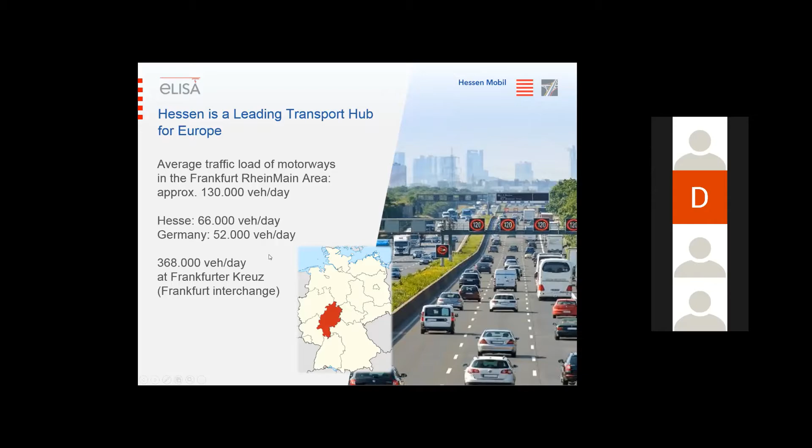And in this surrounding, since many years, we not only operate advanced traffic management systems, but we are also very much involved in development and testing of different future technologies, especially in the field of cooperative, connected and automated mobility, but more and more as well in technologies to decarbonize the mobility system.

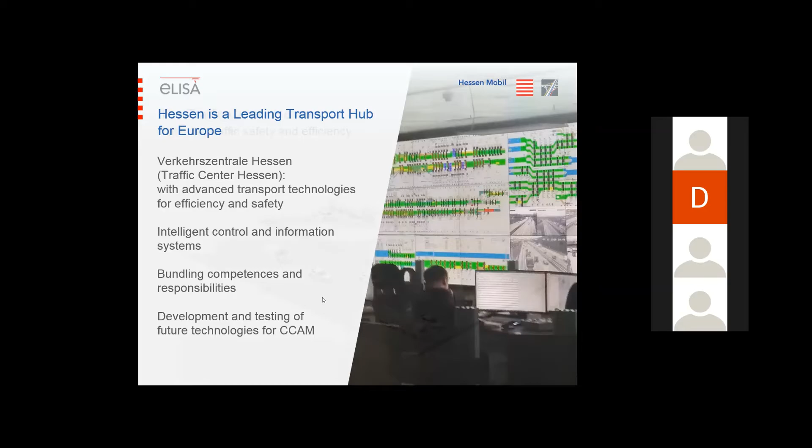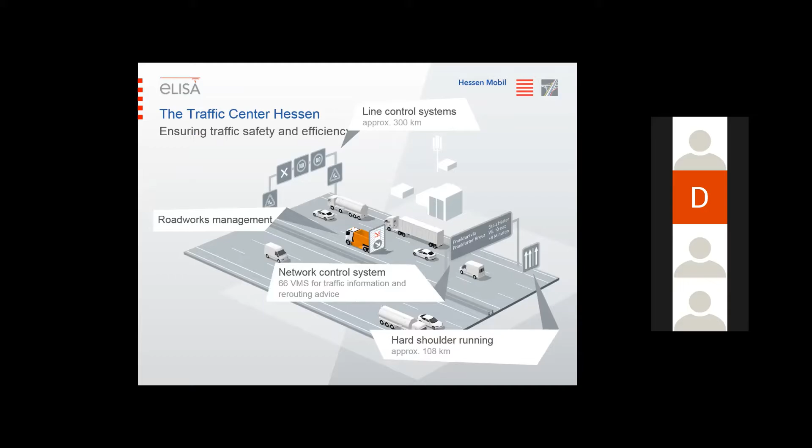Our center is the traffic control center, which is our premise, located right in the center of the region, and from that traffic control center we control, we manage, we influence the traffic on the whole motorway network in the federal state of Hessen, with a lot of different means of influencing and controlling the traffic: line control systems, hard shoulder running, network control systems with VMS signs.

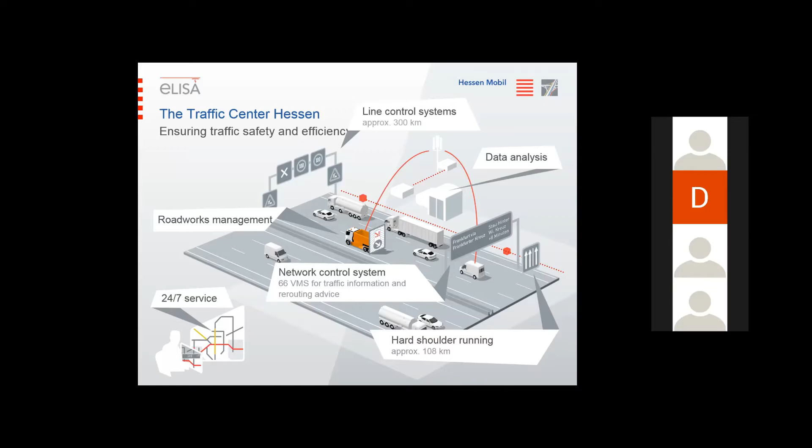And what was a good background for running such an installation like an e-highway is that we are in 24/7 service with our control room. But as you can see, we are traffic engineers. In the beginning of our project we had no electric engineers in our team, no engineers of energy systems, but we of course had some experience in running large infrastructure systems. And this is surely one of the reasons why we said we would like to take the challenge to run an absolutely new system type like an e-highway.

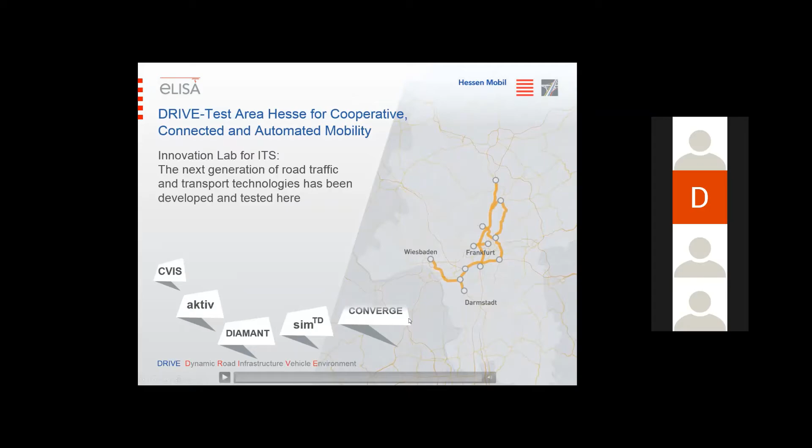So, on that background of being strongly committed to develop and deploy advanced modern technologies and new ideas for mobility, we were very open for the idea to run a field trial to assess the e-highway technology and to make a trial under real and very challenging road traffic conditions, because I told you about the very high traffic volumes on our roads.

So the basic idea was not to hide the new technology somewhere outside where it does not disturb anyone, but really to test it under all circumstances that a region offers which is very much committed to a traffic system which must really work very well.

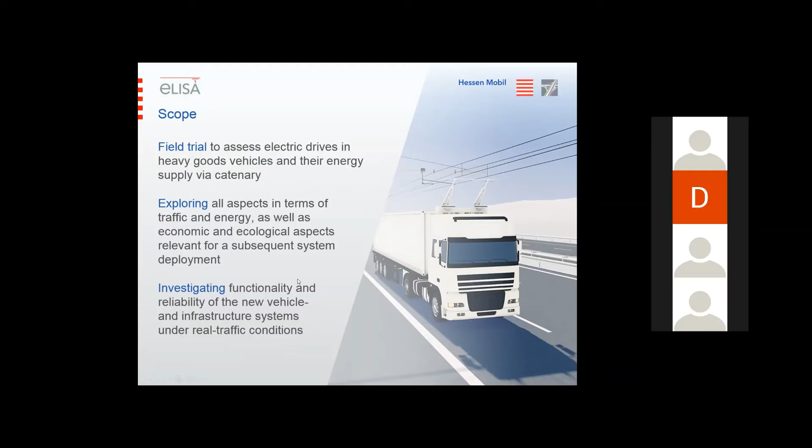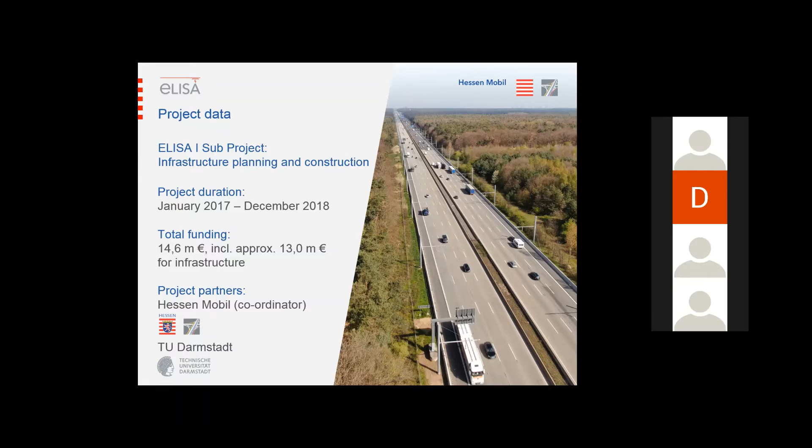And so this was the starting point for the first part of the ELISA project, a sub-project about the phase of planning and construction of the infrastructure. This project ran only 2 years. It started in January 2017 and ended at the end of 2018 after 24 months. We had a volume of funding for the infrastructure investment of about 13 million euro. And together with our scientific partners from the Technische Universität Darmstadt, we started up with that process.

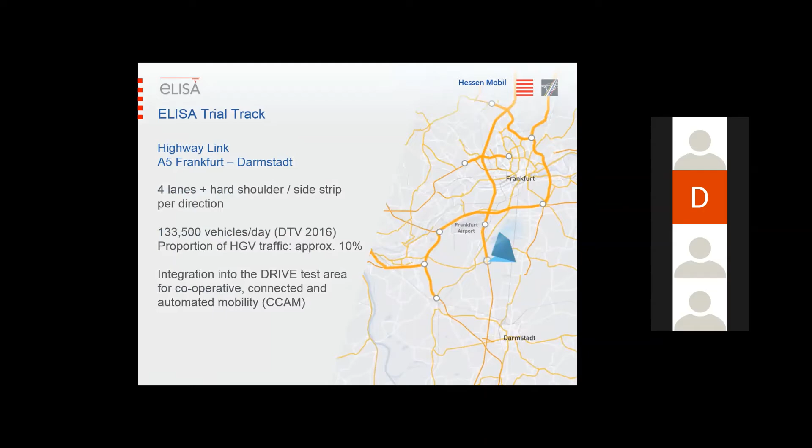The first thing was to select a link on our motorway network where it would be very feasible to construct the e-highway. We took a link between Frankfurt and Darmstadt, which is another important city in our metropolitan region with some industry plants and a lot of scientific institutions. The link of the highway A5 is equipped with 4 lanes plus hard shoulder in every direction, and we have about 133,500 vehicles a day with a 10% proportion of HGV traffic. And it's located right nearby our drive test area.

Drive test area is the name of our area for testing cooperative, connected, and automated mobility, because we see some fields where we could have some benefits in combining e-highway technology later on with some means of cooperative traffic, of exchanging data between the vehicles and so on.

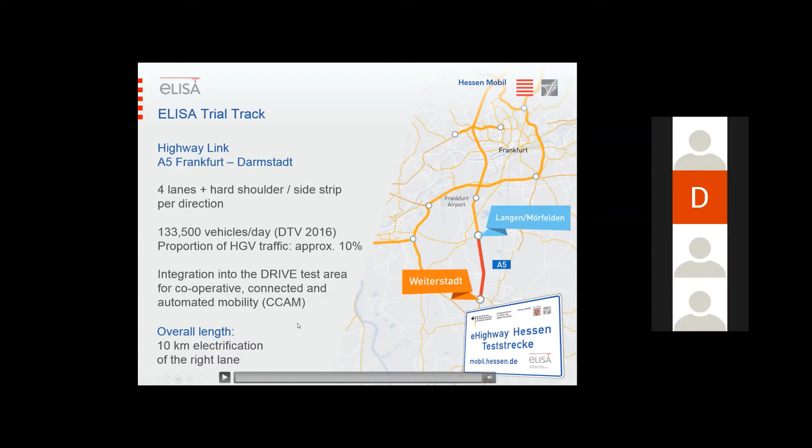So the overall length of our catenary is 10 kilometers, 5 kilometers in each direction, and we equipped the right lane in both directions. So in the planning phase, we had some special challenges, and of course the major challenge was the very short time that we had.

Due to some financial restrictions in funding, we had to manage to spend all the investment money within 2 years, and that meant that we had to execute the legal building permission procedure within a little more than half a year, 7 months, and we had to parallelize that procedure with the Europe-wide tendering procedure for the installation.

And this was a challenge because typically you do not parallelize those two things, because in the starting of the tendering procedure, we did not have any, let's say, any plan, any really detailed specification of the system. We had just the functional description, that we knew what the technology should provide at the road. And so we tendered a functional tender to the market.

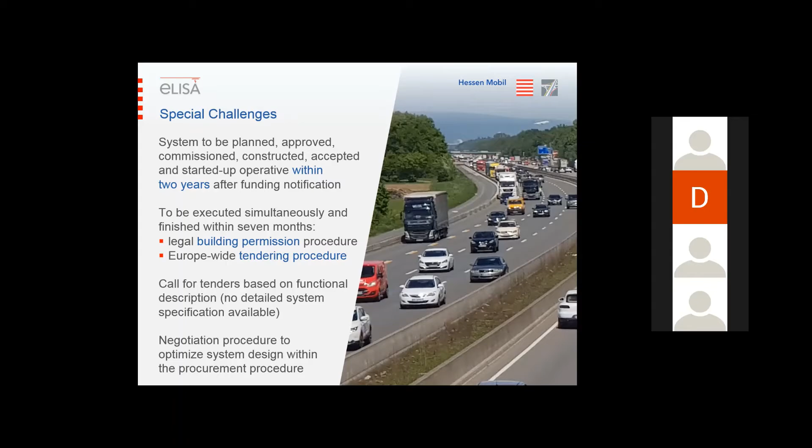And we used a sort of negotiation procedure, an extended negotiation procedure with the bidders, to optimize the system design within the procurement procedure. And so at the end, we were very lucky and really managed that after 7 months we had both procedures, the tendering procedure and the legal building permission procedure, coming to an end.

For the building permission, it was important in the first step to describe what type of infrastructure it is on a legal background, and we could manage to define the system as a road accessory, and this made it then more simple because we had defined procedures to go on and to continue. And we even had the possibility to achieve an abridged project approval to make it much quicker than regularly, when we ensured that we had a consent of all shareholders and authorities.

And so therefore we had to tell the people, tell the shareholders, tell the authorities the basic idea of the project, which is to help to answer that really important question of decarbonizing the mobility system. And in our region, we found a lot of understanding for that and a lot of support. And so with some proactive involvement of all the shareholders throughout the whole approval process,

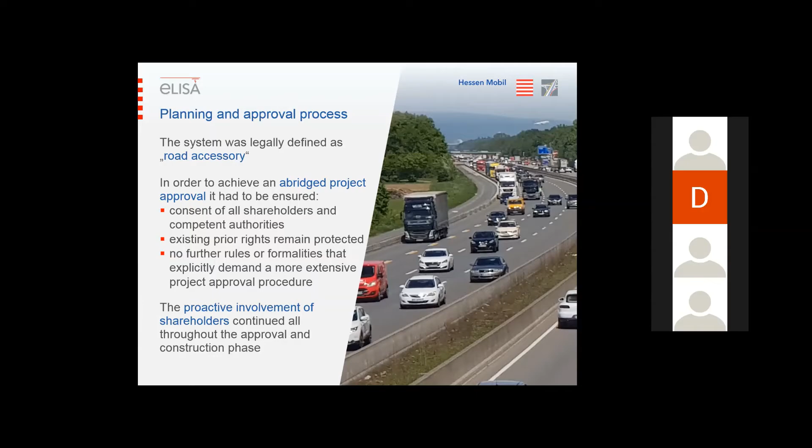we managed this agreement in the region, and this led us to reach our goal to start in August 2017 with the really detailed planning. Some milestones that we took: the building permission at the end of July, the execution planning and construction contracted just 4 days later.

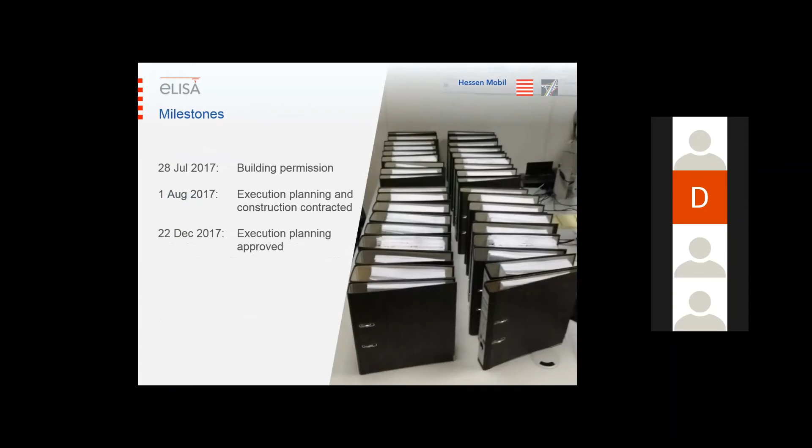Then our contractor had only some 4 months left for the execution planning, which had to be approved by us. And in March of 2018, we were able to start with the construction, with the first pile driving of some tubes into the ground, which were the foundations for the masts.

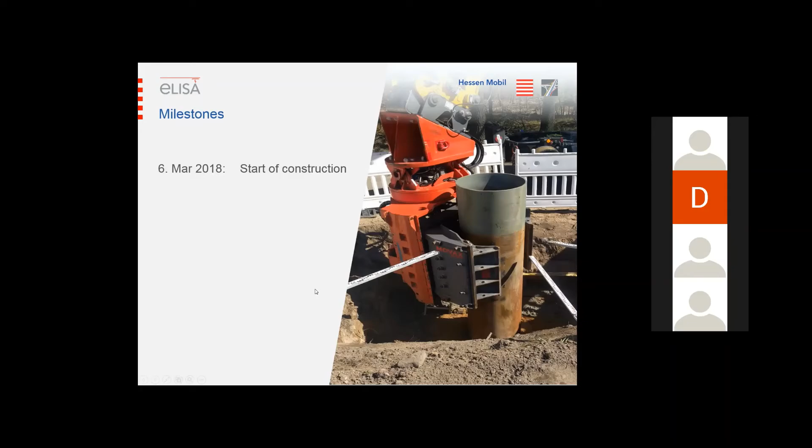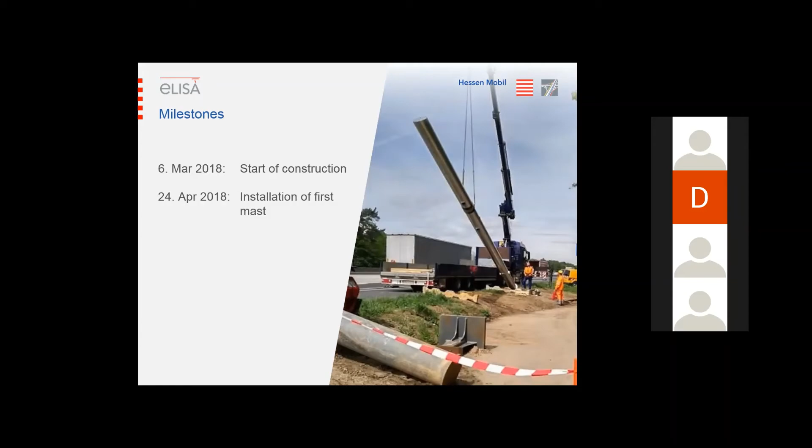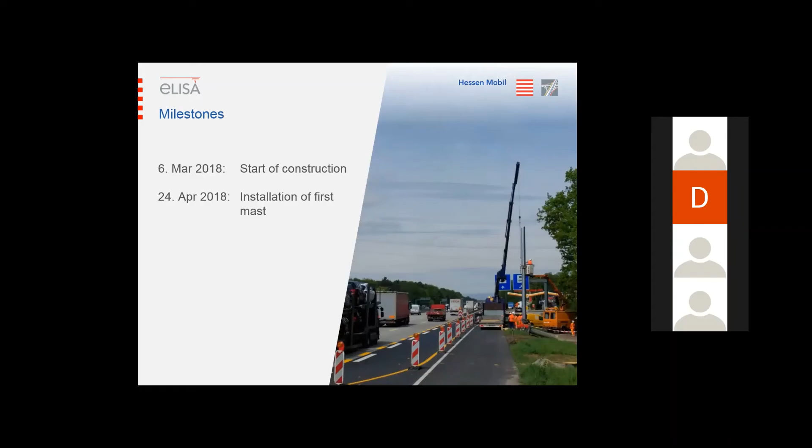Now I have some slides on the building and installation process. I just want to click them through to give you a first impression, in advance, of course, to the video later on. So we started in April with the installation of the first masts, with, of course, large interest from the press and from the public and from TV, which was the first time to see something like that at the side of a motorway.

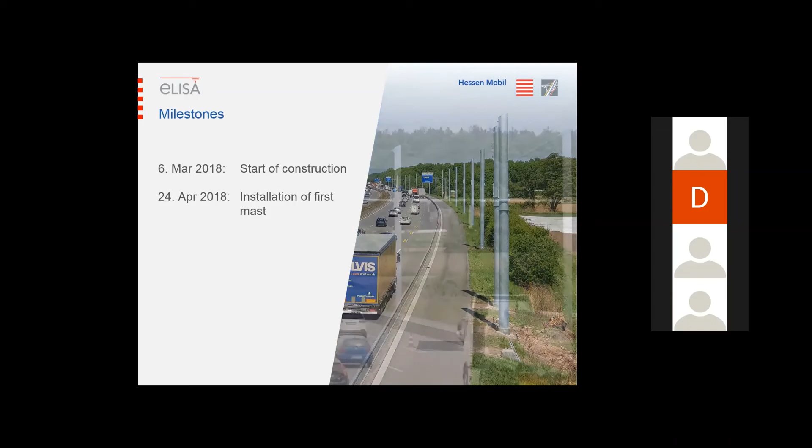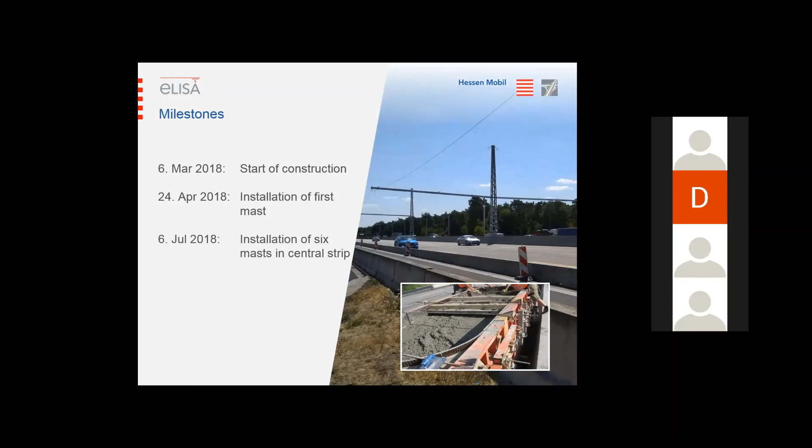Of course, the cantilevers have been installed, and a special solution we needed to find for an area where we have not enough space at the right and left side of the motorway. So we had to install 6 larger masts in the central strip of the motorway, to go through that area where we have a resting area at the side.

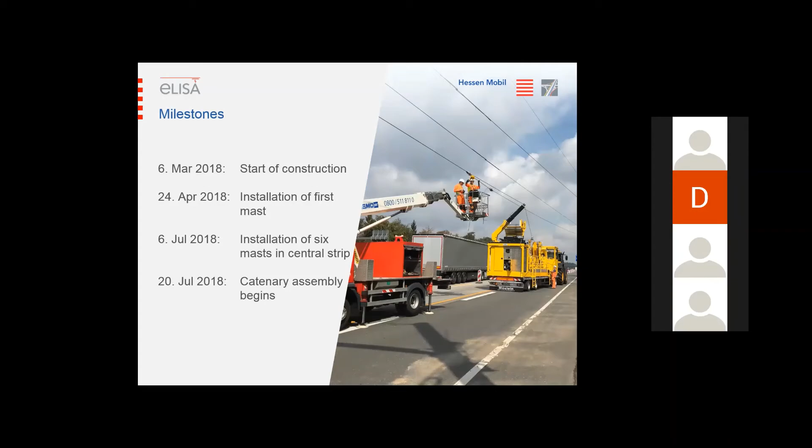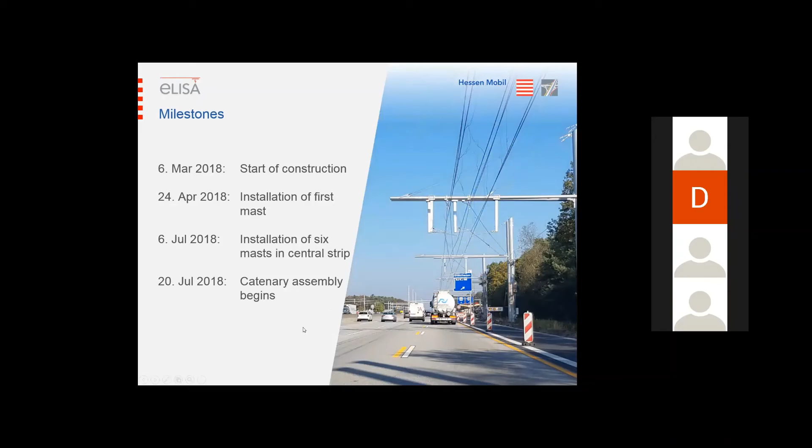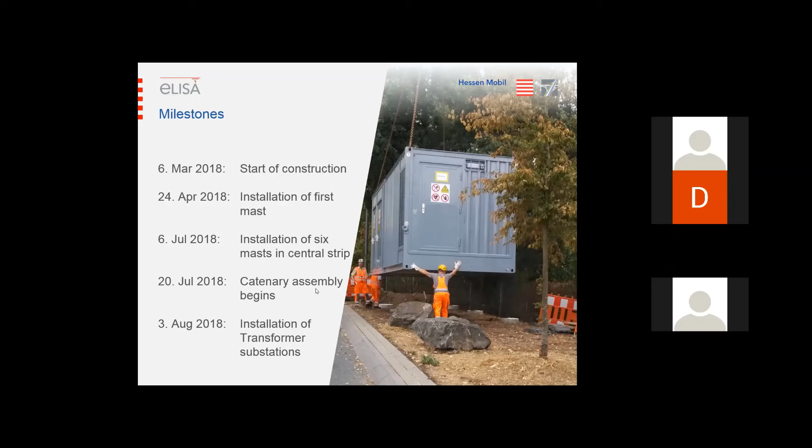Well, in July, our contractor, of course, not we, started with the assembly of the catenary with some very special technologies, of course never seen on a motorway so far. So the process continued with the installation of the transformer substations. So these are some figures: 279 foundations, 223 masts, 2 transformer substations, 10 kilometers of catenary system.

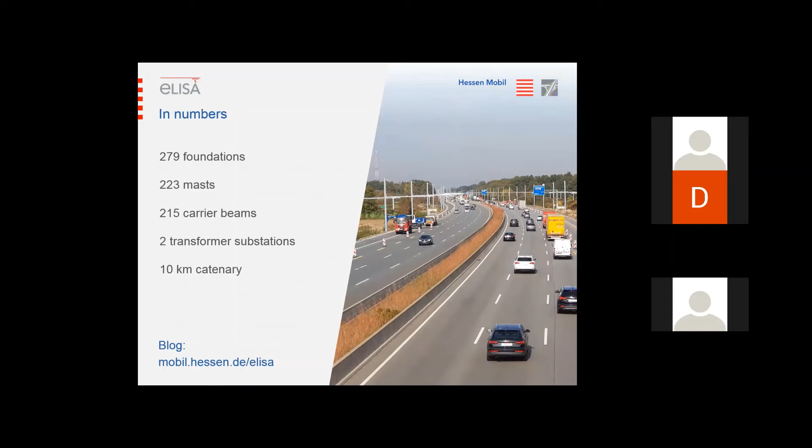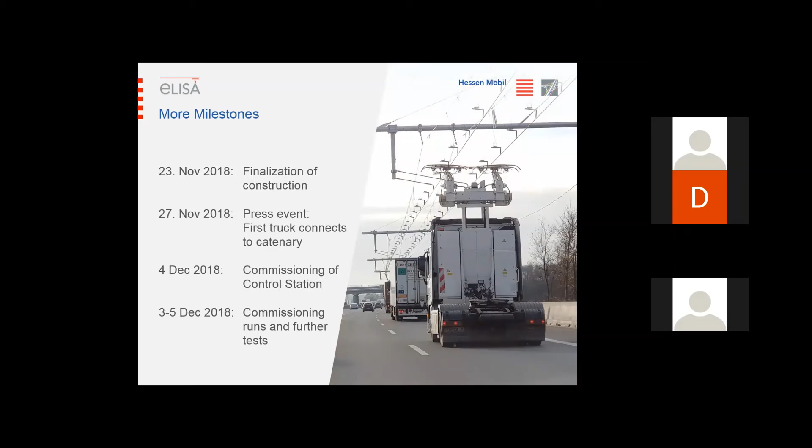The construction has been finalized with some systems to prevent the traffic from crashing into the masts at the side line of the motorway. And at the end of November, we had a press event with the first truck connecting to the catenary. Afterwards, we had the commissioning process, and then we took over the responsibility for operations at the end of March 2019.

Well, after commissioning, of course, we were in the operational phase. We took over the responsibility for operations. We had for half a year an introductory phase, which contained some test runs for preparation of data acquisition, and of course we used the time for education and for some public relations.

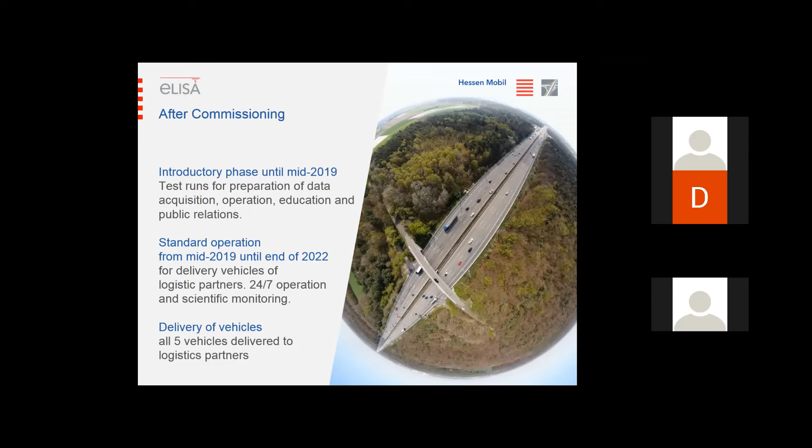Then we had a standard operation phase, which started in mid-2019 with a 24/7 operation, and of course then from mid-2019 on the scientific monitoring. So at the moment, we operate. We have 5 vehicles delivered to the logistics partners, which is the number that was planned for the field trial, and so we are now in regular operation.

The control station of the e-highway system is integrated into the control room of the traffic center of Hessen. So we have 24/7 monitoring by the personnel who work there, whom we have qualified for this special job, which is especially de-energizing and grounding the system in case of emergency.

Of course, we have security systems installed within the e-highway system to automatically de-energize and ground the system in case of any incident. But our personnel in the control room of the traffic center is able to de-energize by remote. And we have a contract with a restoration team of Siemens, which was the contractor for the installations and now is the contractor for the maintenance, that in case of any incident, the team is on the ground within 2 hours.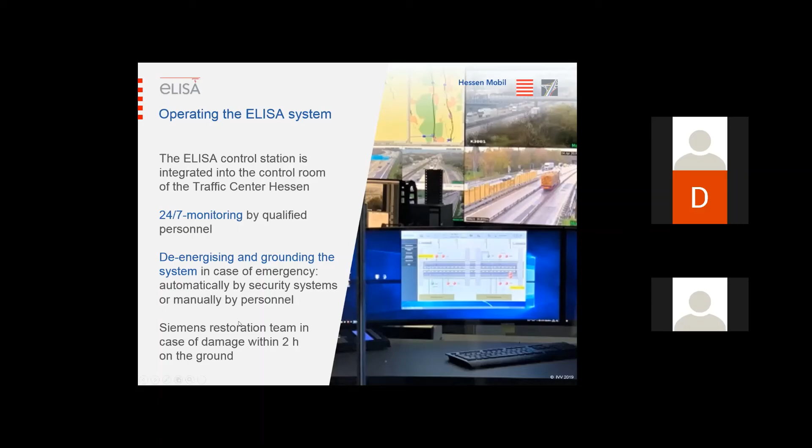An important detail for preparing the operation and achieving the necessary acceptance, especially in the emergency forces, was that we discussed in detail our incident management processes with the emergency forces, especially with the fire brigades, the police, and the rescue services. Because it is very important that they feel safe working in that surrounding, which is of course new for everyone.

But we had very constructive, good and helpful discussions with them, so they are not really full of fear or something like that, and they don't search for problems or reasons to be against operating such a thing on the motorway. So we have very good consulting and a very good way to act together with those emergency forces.

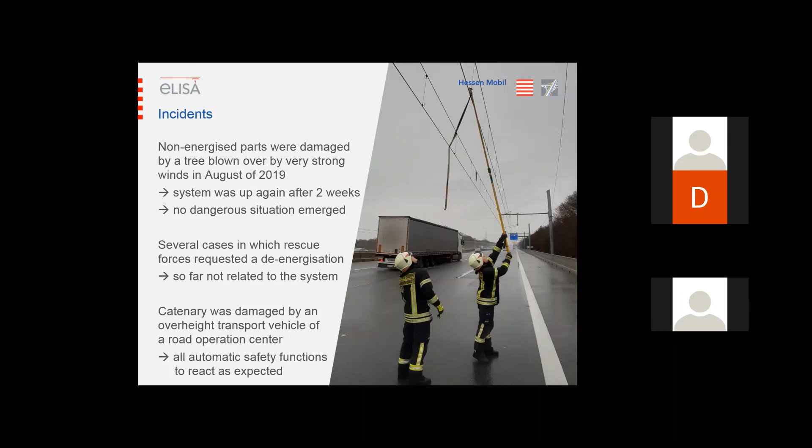At the beginning of this year, the catenary was damaged by an overheight transport vehicle of a road operation center, so colleagues from ourselves damaged the catenary. But there we could assess that all automatic safety functions reacted as expected, and I think these are very important, good lessons learned from our first phase of operation of the e-highway system.

Of course, we have some routine checks in the maintenance of the ELISA system. Our motorway maintenance department has the task to continuously watch whether the installation is in order by their regular route control drives. We have regular checks by the ELISA staff itself, and of course we have an inspection plan.

Twice a year there are regular inspections, which in the first instance took about 1 week each, but that does not mean that we have the system off for 1 week. We reduced it to 2 days the second time, and maybe we learn to get much quicker in the future.

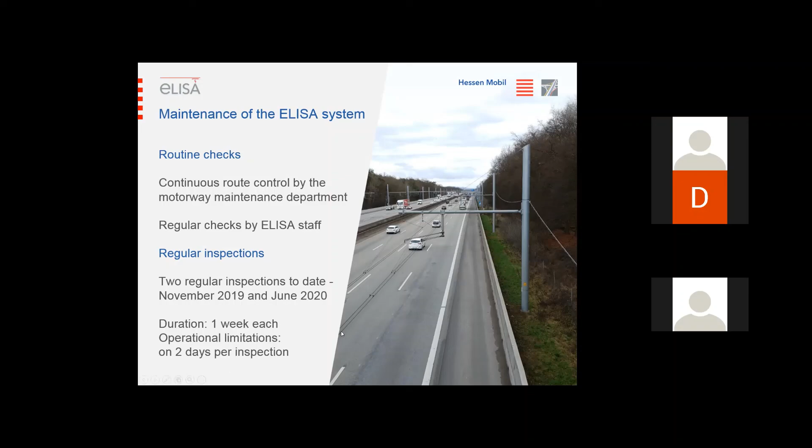So yeah, well, we have some more years in front of us. We will, of course, assess and watch and learn from all those daily happenings, incidents, and influences from the weather and the traffic, and I think after those 4 years of field trial, we will really have a very good and stable insight into how to operate a system like this.